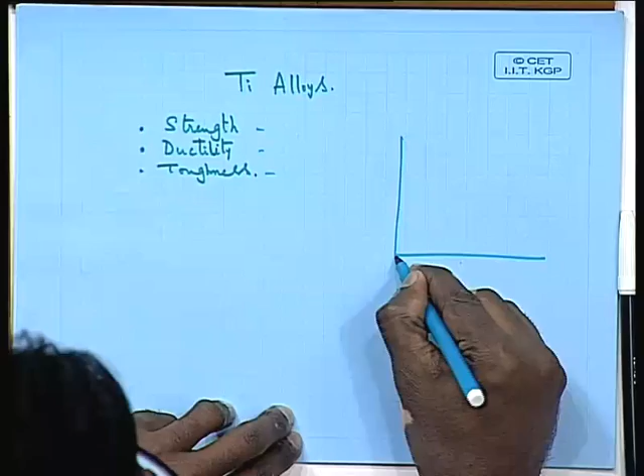But when you talk of toughness, toughness is basically the resistance of a material to crack propagation. Whenever you have a crack initiated in a material, if the crack propagation is made more difficult, we say the material is more tough. Quantitatively, we take the area under the stress strain diagram—if you have the stress strain diagram, stress versus strain—this area under the diagram is nothing but the toughness.

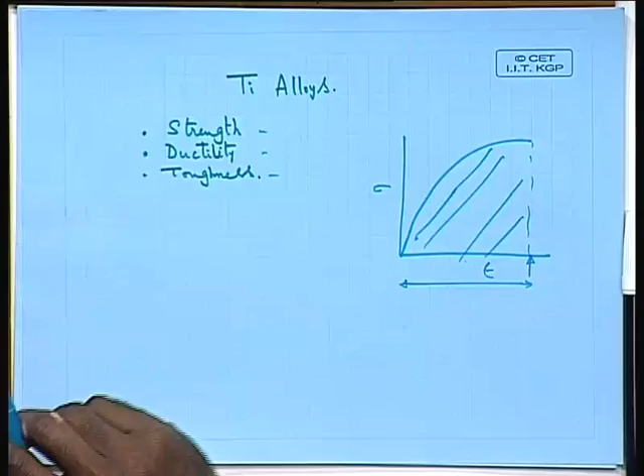That's how we measure it. Percentage elongation is the total elongation that you have before the fracture has occurred. So quantitatively that's percentage elongation. But qualitatively we know the two concepts are different: one is about deformability, the other is about the resistance of the material to crack propagation.

That's why we say a brittle material has very poor toughness, because a crack can propagate very fast and then finally the material will break. Whereas a material, for example martensite, is very tough under many conditions. In many alloys, martensite is very tough, though it may not be very ductile. So what controls this?

How do we control the microstructure to control these two properties, ductility and toughness, and finally the strength also, to ultimately get a proper combination or an optimum combination of all these three? This is one effort which in titanium based alloys people have successfully achieved—trying to control the microstructure of alpha. We know alpha is a low temperature phase, and beta is a high temperature phase. So if you take a high temperature beta and try to cool it, what do you get from there?

When you take a beta which is at high temperature and start cooling it, alpha should precipitate out of it. Depending on the composition, the volume fraction of the alpha is going to be different. So usually alpha has to precipitate, unless you are talking of alloys where a large amount of beta stabilizers have been added such that beta gets stabilized even at room temperature. If you do not consider such alloys, all those alloys where alpha plus beta is possible at room temperature—when taken to high temperature it is beta, and when you start cooling it, it gives alpha. But now the question is, depending on the morphology of this alpha inside the beta, the properties are going to be different.

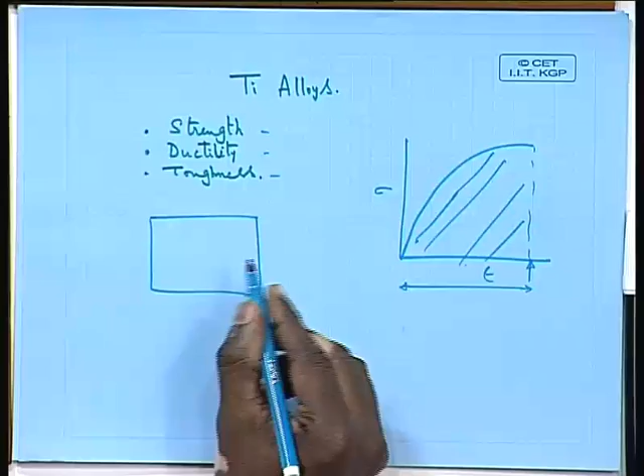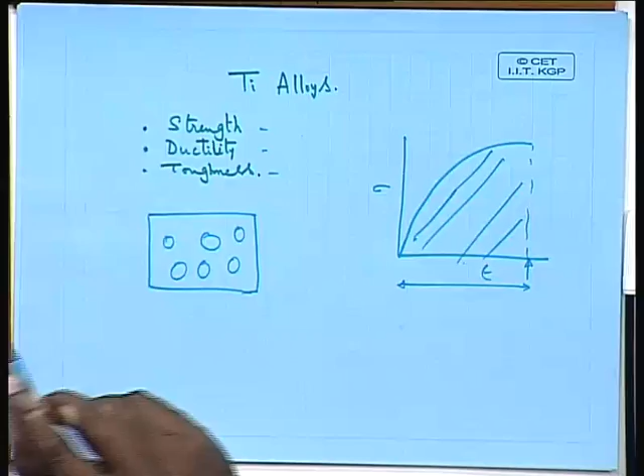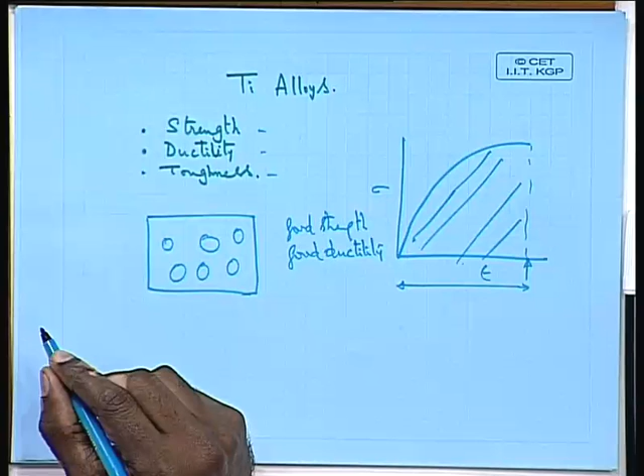If you have a microstructure of beta in which alpha forms as spherical particles, or some kind of more or less spheroidal particles, in this kind of material, if you look at the mechanical properties, you will have good strength because it is a two-phase mixture—whenever you have a two-phase mixture, you get good strength. And if you look at the ductility aspect, this material will have very good ductility as well—good strength, good ductility. Why good ductility? Because the particles are spherical, the material can be easily deformed. There is no triaxial state of stress coming into picture.

This is what we have seen in case of spheroidal graphite iron, or when we take high carbon hypereutectoid steels, and spheroidize the cementite. There also we see that we can improve the ductility. Whenever you have spherical particles, you will not have a triaxial state of stress at the corners. If the particles are needle shaped or acicular, at the tip of each particle you will have stress concentration, which leads to crack initiation and fracture. So you have to avoid stress concentrations, and the best way in a two-phase material is to have spherical particles. That's why this material gives good ductility, but not good toughness.

If a crack is initiated inside the material, let us imagine a crack is initiated here, it can easily propagate because these are all mostly spherical particles. Spherical particles do not really offer much resistance for crack propagation.

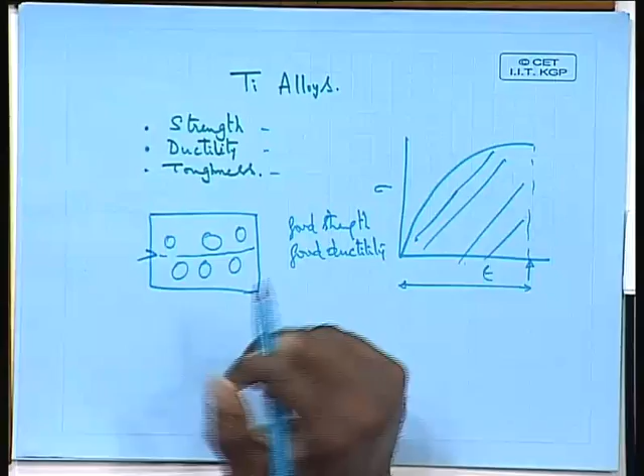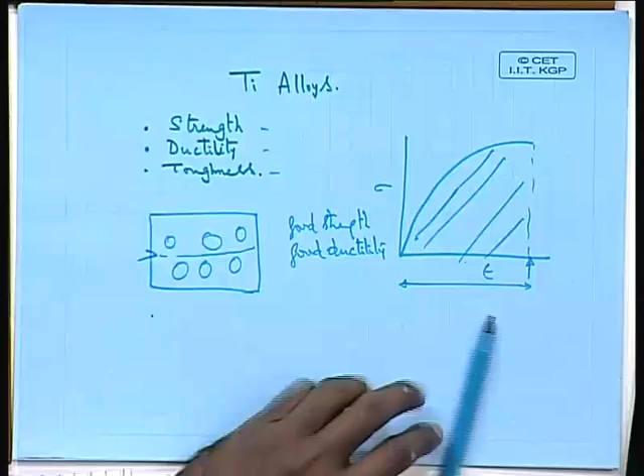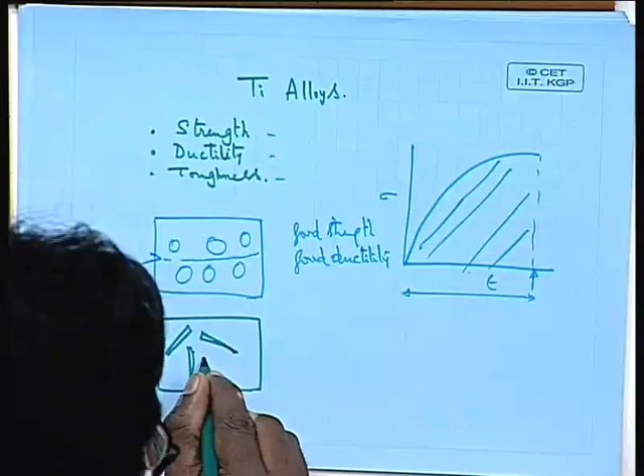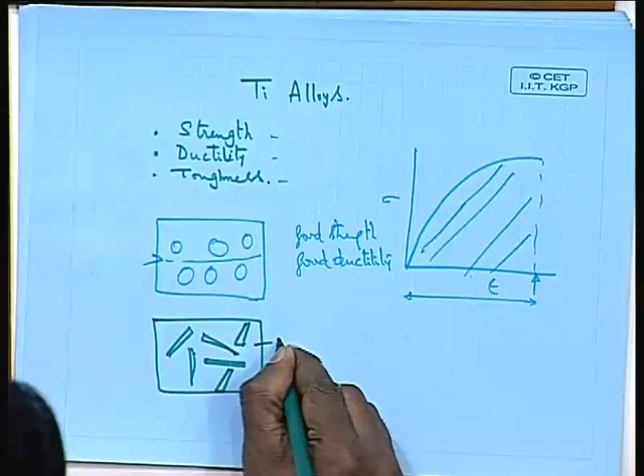But if you have acicular type particles, particularly randomly oriented, let's look at another type of microstructure where you have this type of acicular particles in a beta matrix. The matrix is beta and these particles are alpha. Again here also the particles are alpha and the matrix is beta. If you look at this kind of microstructure, like the first microstructure, it will have good strength, no doubt.

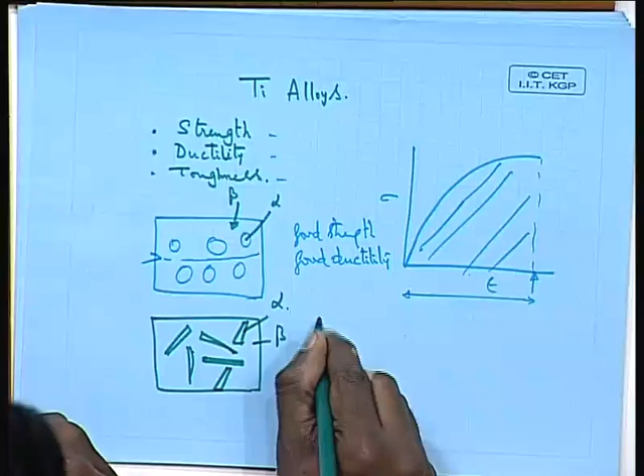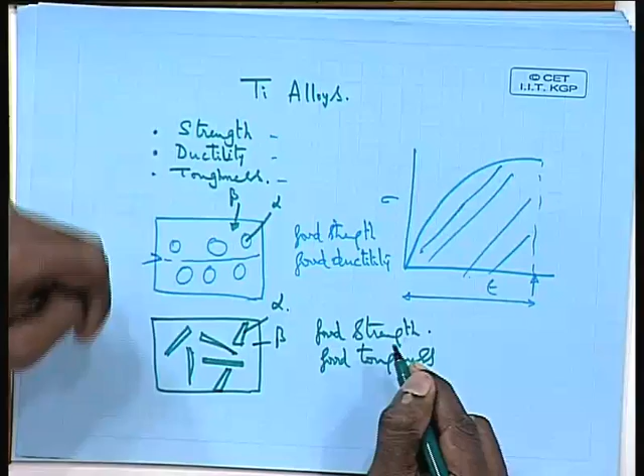And it will have good toughness, but it will have poor ductility. The ductility of this alloy will be very poor. So as a result, we can see that these two different microstructures - one has good ductility, another has good toughness - and the two do not have both. The first microstructure does not have good toughness and the second microstructure will not have good ductility.

So this is something which people knew quite before, and in titanium based alloys they try to see how we can achieve a combination of these two. The easy way to say is try to have both types of particles. The question is how to have it.

What people try to do is, we know that the morphology of the second phase depends on the way we do the heat treatment, and particularly on the temperature at which the precipitate comes out. Usually if you have a high temperature single phase such as beta, and it is cooled very fast to a low temperature, and the precipitation starts at a low temperature, at low temperature the precipitation usually is Widmanstatten type, acicular type of precipitates.

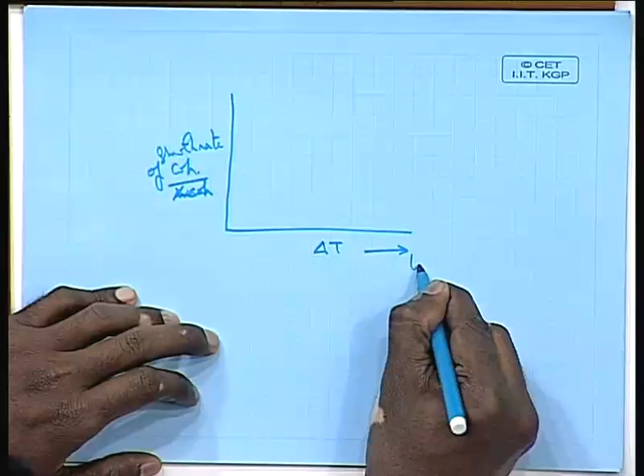If you look at the growth rate of coherent versus semi-coherent, coherent versus incoherent precipitates, at low temperature - if you are talking of delta T increasing, that means high delta T means low temperature, low delta T means high temperature - at very low temperatures or high delta T, the growth rate of coherent precipitates is much faster.

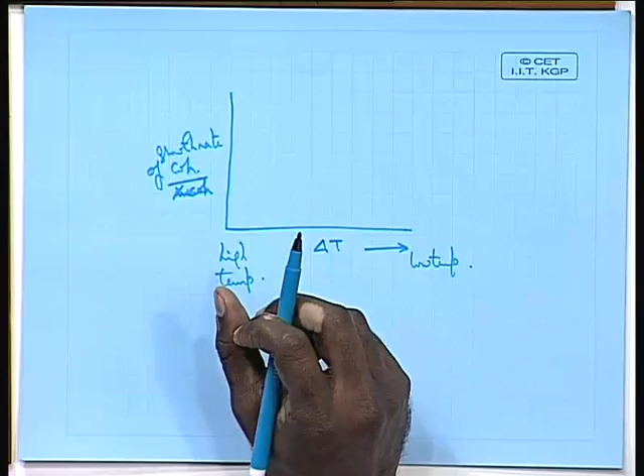Because the precipitation of incoherent precipitates does not occur at high undercoolings. Whereas when you come to high temperatures, the ratio between these more or less reaches equivalent to 1.

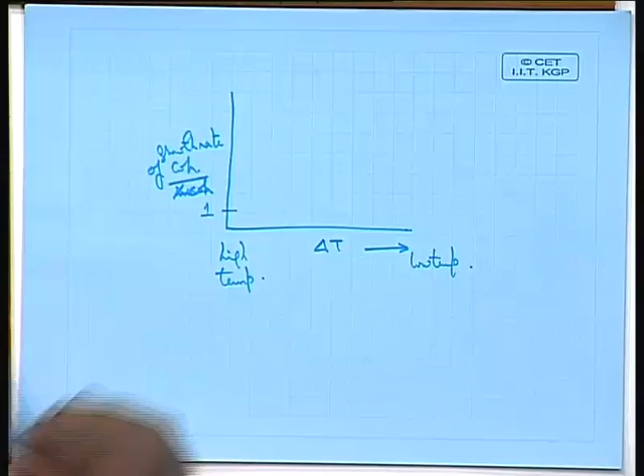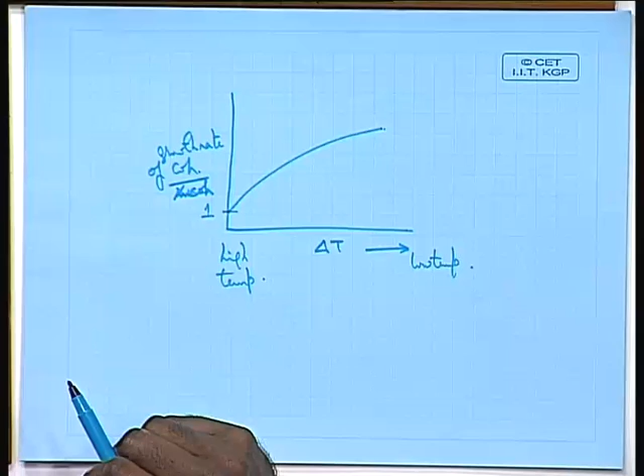So if you try to plot, you will get this kind of situation. The tendency for the formation of coherent precipitates is much higher at high undercoolings, and when you come to low undercoolings, very close to the transformation temperature, you have a greater tendency for the formation of incoherent grain boundary allotriomorphs. That means the precipitation occurs near the grain boundaries, not within the grains, and then the growth occurs into the grains, and the morphology of the precipitates will be more or less spherical, not really acicular. They more or less grow in a symmetric fashion into the grain boundary in a more or less spherical kind of situation.

As a result, one can have a two-stage precipitation process to achieve both types of microstructures. That means you first heat it to a beta single phase region, then cool it suddenly to a temperature just below the transformation temperature, and hold it for some time so that grain boundary allotriomorphs come out. Then, before the precipitation is complete, you take the sample out and quench it to another, low temperature furnace, holding it again so that the remaining precipitates come out as Widmanstatten type acicular precipitates.

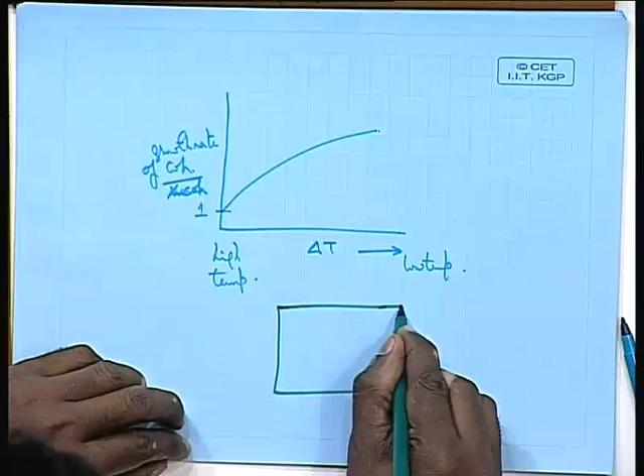So this is a two-stage precipitation process, or two-stage annealing process, people have adopted in titanium based alloys to give a combination of both, where you have some precipitates of this type and some precipitates of this type.

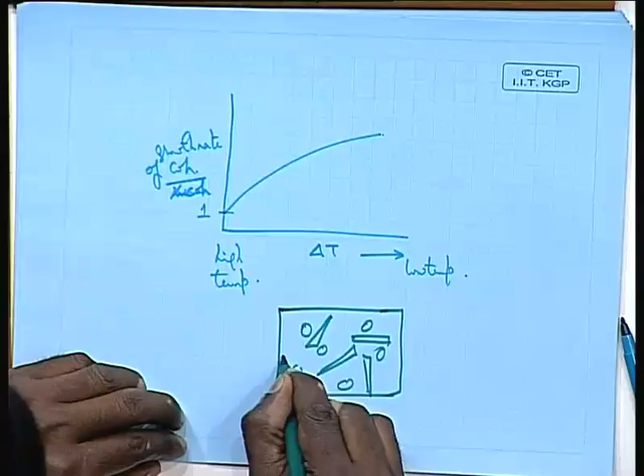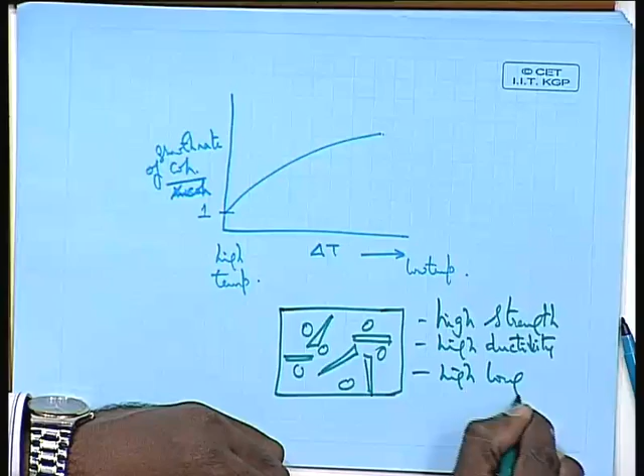If you have a combination of these two types, then you achieve what you are really looking for: high strength, high ductility, and high toughness. A good combination, I would say. I would not say all of them are very high, but an optimum combination of all three.

Under these circumstances, it will not be a situation where the toughness is very low or the ductility is very low. They will be reasonably high compared to either of the two microstructures shown before. In this way, in alpha beta alloys, people have been able to get a very good combination of properties, and these are being used nowadays for high temperature applications, at least about 550 degrees centigrade or so.

This is particularly for airframe type applications where you need some formability and high strength. So these type of alloys are definitely not useful for high temperature jet engine type applications, because in jet engine applications you need more or less a single phase alpha. If you have a two phase microstructure, unless the second phase is very stable, such as a dispersoid...

As we have seen in nickel based superalloys, for example, yttria is added, which does not dissolve back into the matrix. So for high temperature applications, you really need precipitates which do not dissolve back into the matrix at high temperature. If they start dissolving back into the matrix, obviously you cannot use that alloy for high temperature applications.

First of all, why do we call them shape memory? What are the basic requirements for a particular alloy to show a shape memory effect, and what kind of alloys show this kind of effect? Let us try to see that. What is a shape memory effect? First of all, a shape memory effect is basically where the sample remembers its shape, which was under a certain condition, when it has been taken to some other processing condition and brought back to the original condition.

For example, you take a titanium nickel alloy, a 50-50 alloy. What kind of structure does a 50-50 alloy have? Do you know? TiNi, it's a BCC B2 type ordered compound. It's a B2 ordered compound. So if you take a B2 ordered compound, it has a martensitic transformation. It undergoes a martensitic transformation at low temperature. TiNi is one of many alloys which show martensitic transformation.

We know even steels show martensitic transformation. Similarly, TiNi also shows martensitic transformation, but the difference is this particular alloy shows shape memory effect, which normal steels do not show. We will also try to understand why normal steels do not show it. So let's try to see what happens in this alloy.

You take the austenite in TiNi, the high temperature phase usually referred to as austenite, though it has nothing to do with steel austenite. Nowadays, wherever a martensitic transformation takes place, the high temperature phase is usually called austenite, though it is not related to iron carbon austenite. So that austenite, if you cool it below the MS temperature, where martensite starts forming, you bring it to the martensitic condition.

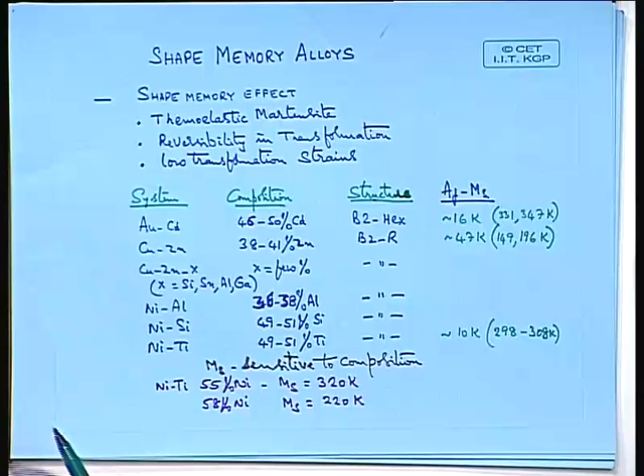Copper zinc alone shows this, but if you put a small amount of silicon, tin, aluminum, or gallium, it also shows a good shape memory effect. And nickel aluminum (NiAl), and nickel silicon (NiSi). So there are a number of these alloys, and what is important to note is most of these alloys show the shape memory effect at intermetallic compositions. Most of these phases which undergo martensitic transformation and give the shape memory effect are mostly intermetallics and ordered intermetallics.

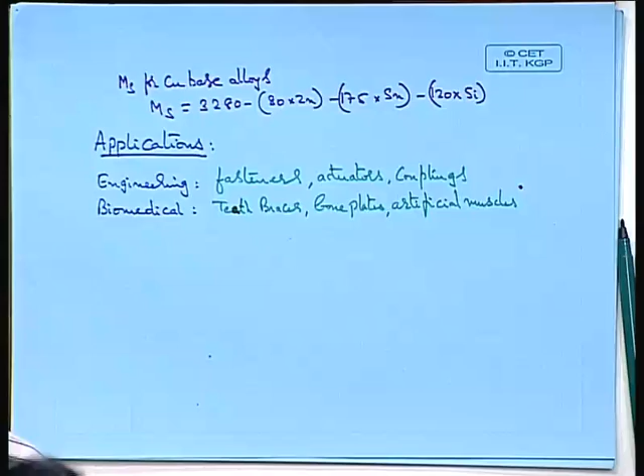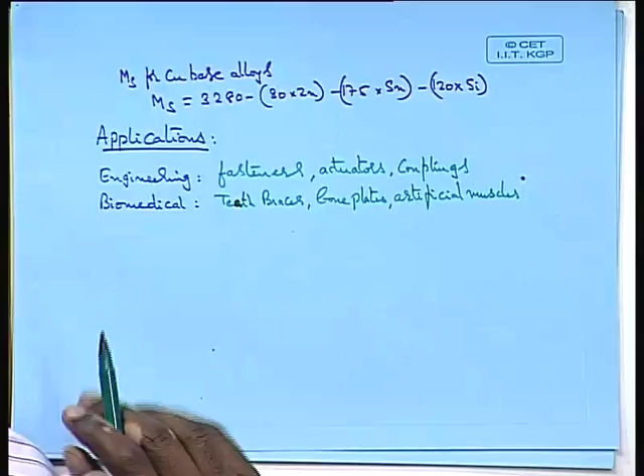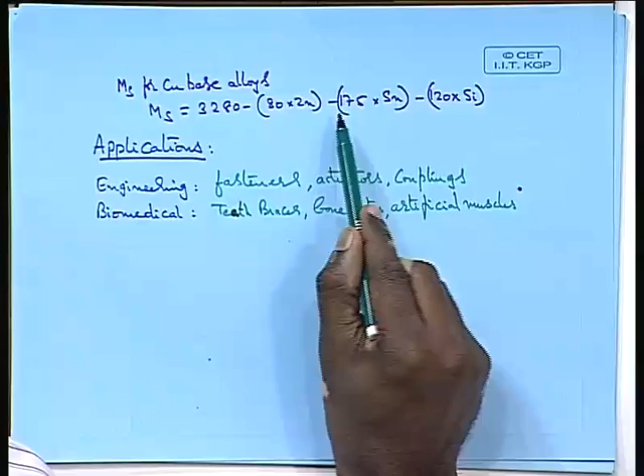These ordered intermetallics undergo thermoelastic martensitic transformation, which gives this kind of shape memory effect. This MS temperature, as mentioned, is a function of composition in many alloys. If you look at copper zinc based alloys, the MS temperature is a strong function of composition, as shown here: MS is given by 3280 minus 80 times zinc, minus 175 times tin, and minus 120 times silicon.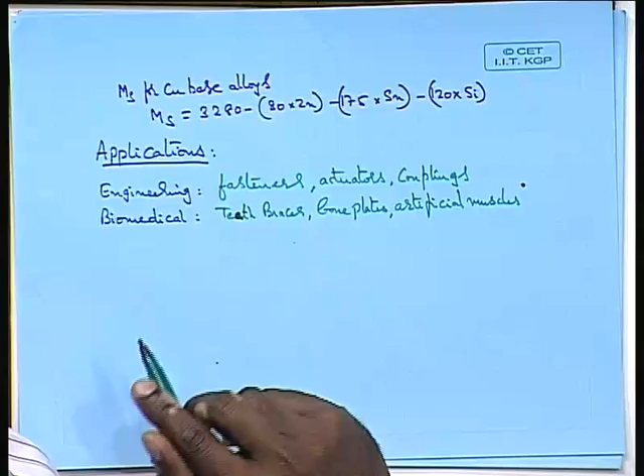You can see clearly how strongly each of these elements affects things, these are all atomic percentages shown here. Each element almost very strongly affects this MS temperature, and MS temperature is very crucial to know what is the temperature below which this transformation occurs.

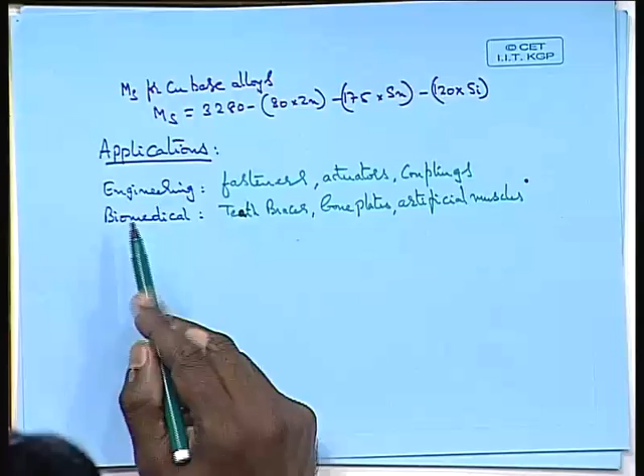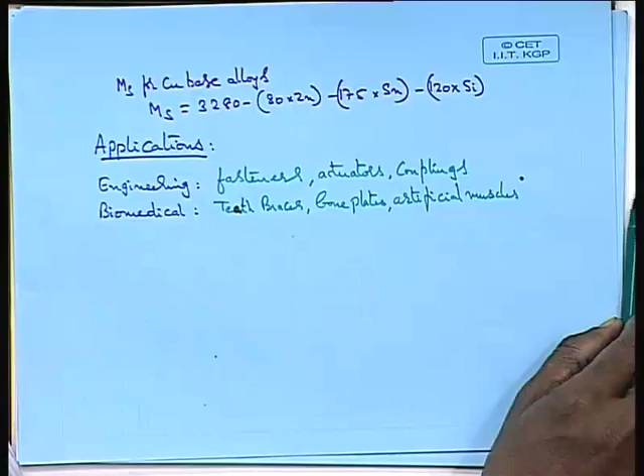If you look at the applications, they are very wide. We have engineering type applications and biomedical applications. I will also try to show you some pictures that I have collected. In engineering applications, the most important ones are where you need couplings and actuators, particularly in sensors. We will try to see some of them.

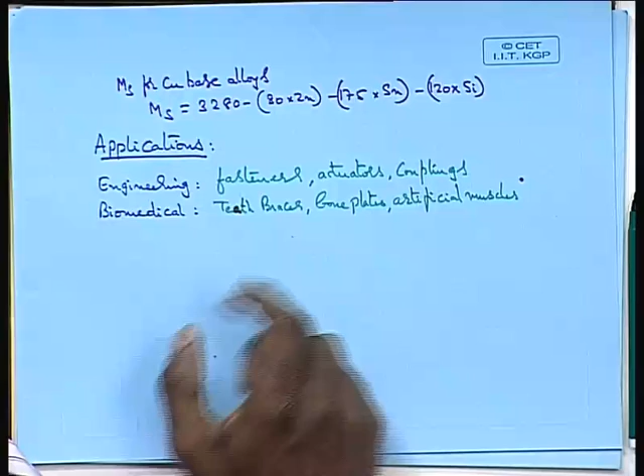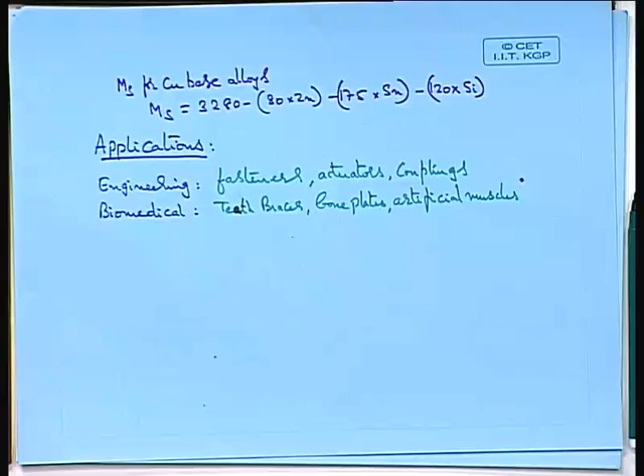In biomedical applications, particularly whenever there is a fracture in the bones, so bone plates or teeth braces, even for example artificial muscles, when you have an artificial heart installed in the body. The artificial muscles can also be shape memory alloys, where at body temperature they can contract and expand. So whenever there is blood pressure, based on the blood pressure, one can have expansion and contraction, and that can lead to the typical blood flow in these veins of these artificial hearts. So one can use them here. Let's try to see some of these here.

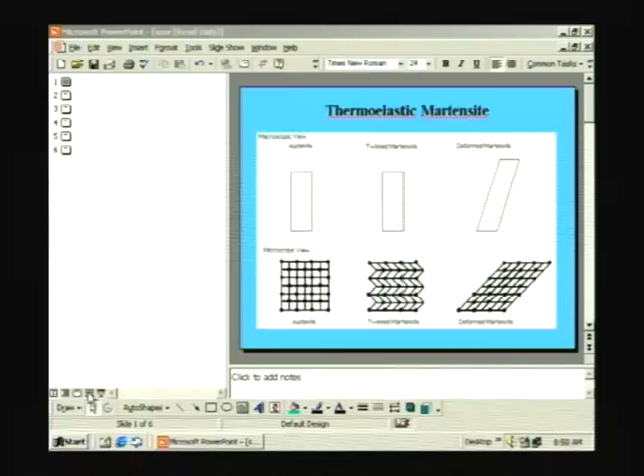What is this thermoelastic martensite? If you look at the austenite in most of these things, it is cubic in nature, the B2 type of structure, and the B2, if it transforms to the martensite, thermoelastic martensite, the strains present during this transformation are absorbed into this martensite in terms of a lot of twins.

You get a lot of twinning inside the martensite where the strain is stored, and if you deform this martensite at temperatures below the MS temperature, the deformation leads to a shear type of deformation and deforms this martensite, and when you heat it back, you get back this particular structure.

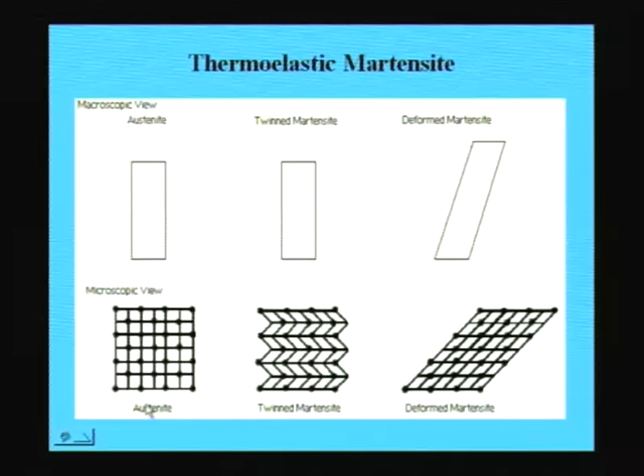How does this occur? A schematic picture is shown here, where the austenite at high temperature is brought to the martensite by cooling, and during this transformation a lot of twinning takes place inside the martensite. When you deform this at temperatures below the MS temperature, this martensite gets deformed, and this deformed martensite, if you start heating it, you get back this austenite, and whatever deformation you have given is lost and you get back the original shape. That is what we call the shape memory effect.

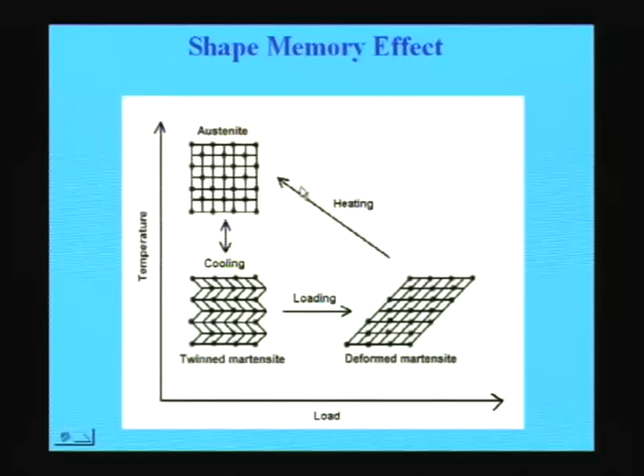What is this kind of principle called? We have talked about it in thermodynamics - the Clausius-Clapeyron equation.

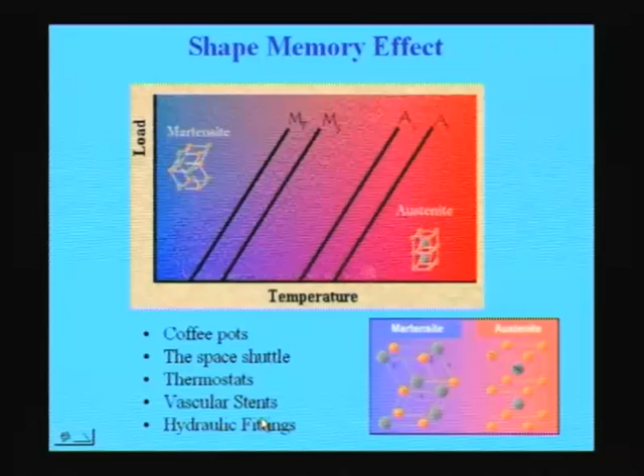A number of applications are given here where we use the shape memory effect, starting from a simple coffee pot to a space shuttle, thermostats and hydraulic fittings - different applications where we use this shape memory effect.

The other most important concept here, very similar to the shape memory effect, is called pseudo elasticity. In a shape memory effect, what we do is take a high temperature structure, bring it to room temperature, deform it below the MS temperature. I do not call it room temperature because we do not know where the MS is, it depends on composition. So we bring it below the MS temperature, deform it in the martensitic state, and then heat it back, and we get the austenite back and the original shape back.

Whereas in pseudo elasticity, we do not change the temperature. We keep it at a temperature above the AF, where it is completely austenite, and start deforming the alloy. When you increase the load at a fixed temperature above the AF, the moment you start deforming it, it becomes martensite because deformation induced martensite comes into the picture, and once you come to a martensite completely, either above the MS or completely above the MF depending on your interest,

and then release the load. Once you release the load, the shape comes back to the original position. So here there is no temperature involved, it is only the deformation. The shape comes back to the original position basically because the strains that are involved are elastic strains and deformation induced strains. And these deformation induced strains, the moment you release the load, come back because the amount of strain is very small.

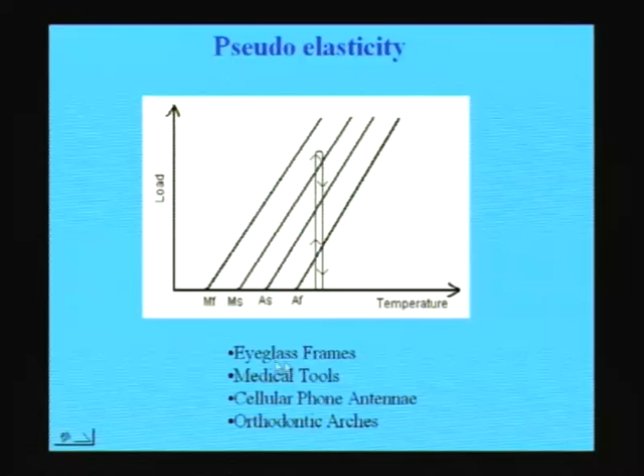Whereas here the amount of strain involved during the transformation is small, because of which if you deform it to the martensitic condition and then release the load, it comes back. So you can see vertically in the loading direction we go up, and then release the strain, it comes back to the original position. This concept is used in a number of examples, such as eyeglass frames, where this kind of thermoelastic martensite pseudo-elasticity is used, cellular phone antennas, orthopedic implants, orthodontic implants and other medical tools. Some of the examples are shown here.

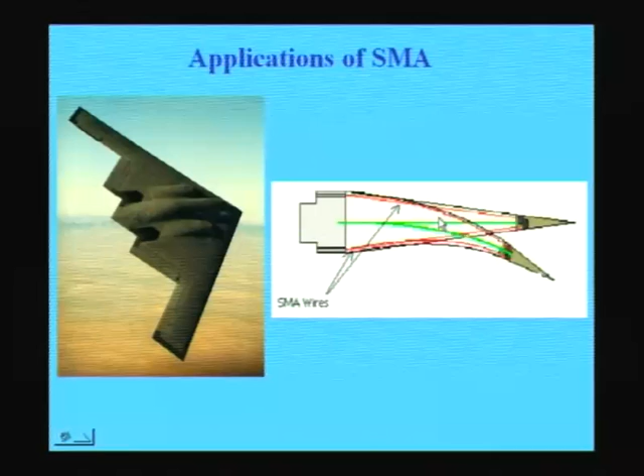So you put one plate at the top and one at the bottom, and hold it there for some time, let's say 2 months or so. During this period the bone grows, and once these two get joined, you do another X-ray and find out that both are joined with no dislocation or crack, and then you can remove those plates. This is the usual technique everybody employed until shape memory alloys were discovered.